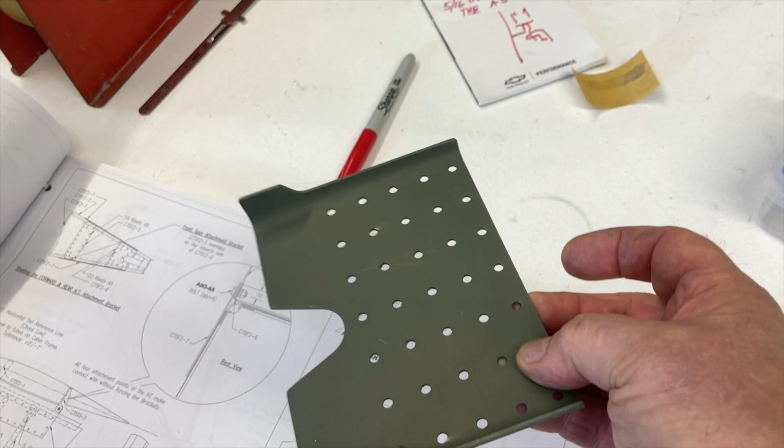All right, I finally got it done and it came out really nice. As you can see, originally there was a piece all the way across there, and they had it outlined where we were supposed to cut it and then trim it. And I did all the measurements to see if they had the lines on there correct, and they did a really nice job. But I went back on the lines with this and added just the width of that marker.

I can always file that down if I have to, but that is exactly the extra that I left on this part and this here. This is that bracket with the tab. I'll just call this the tab. This is the outside bracket that a bolt goes through to the tab.

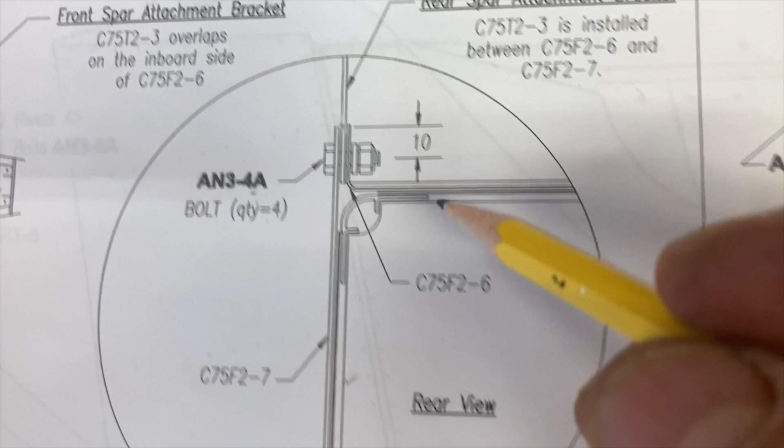And up here is the blow up of it. And this is the tab. And it's sandwiched between the outside bracket and this inside bracket. And that is the only thing holding the stabilizer to the airplane, except for, of course, where the tail overlaps.

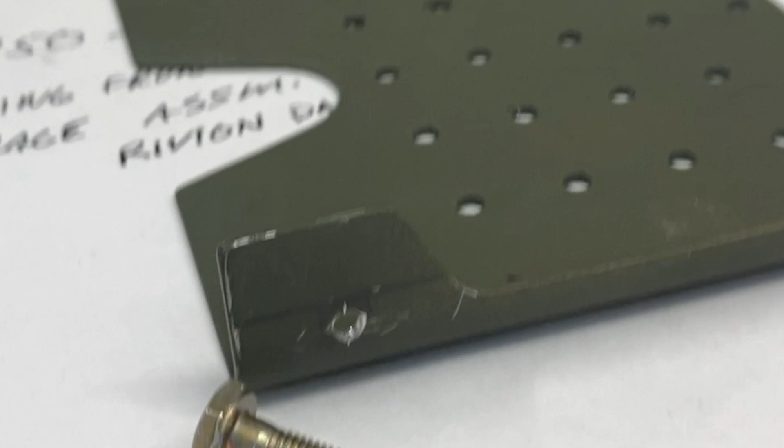Okay, I finally figured out my edge distance. I wanted to get my pilot holes drilled before this is on the tail and I'm up on the airplane with it. So I absolutely know my edge distance there, and everything's going to be built off this bracket, edge distance wise. I added a 1/16 of an inch.

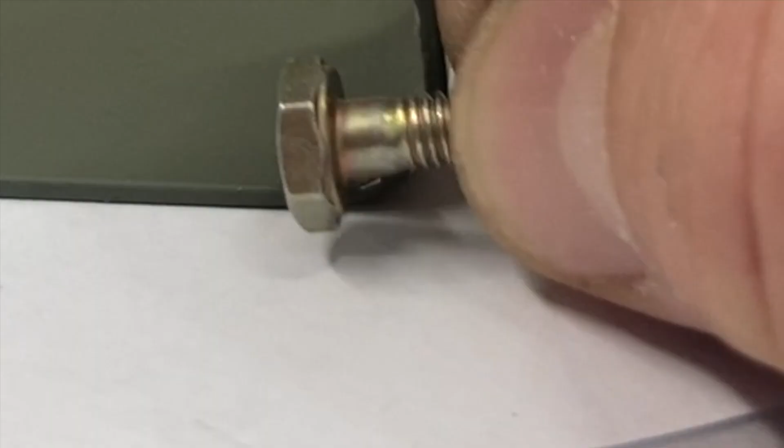It's going to make it a little more challenging to get this to clear the radius, but I can make a washer, carve that washer out that I make so that this sets without touching the head on the radius, and I'm pretty confident in that. And everything's going to be built around that dimension right there.

Okay, this is where we're at on the stabilizer and the elevator. I've got all the parts prepped. I've got the ends all rounded, sanded. Found a really good way to denib without using the whole denibber, because that does countersink, I've noticed, every time I use it. These were pretty wonky. I still got to do some work to them.

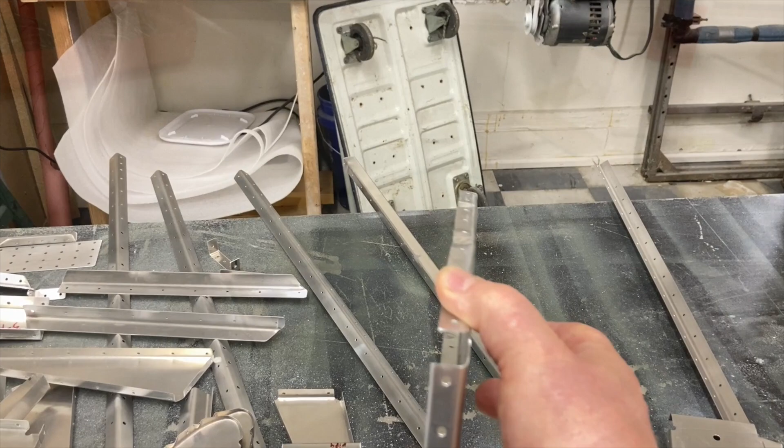I had to reflute this one right here a little bit, trying to get a little bit of bend out of it. Found a really good spot here. I take the angle pieces. I got a new technique. New. All this is new to me. But let's just take one of these pieces out here and I'll show you what I mean. Talked to the guys on Facebook, and they seem to think that it's okay.

I lay this on here, use a block with 400, and it's the aluminum oxide paper, and just sand along really nice, flip it over and do the inside, and it just doesn't take off hardly anything, but it makes the holes nice and square.

When I use this tool, which is a great tool, I've looked at it close. It does seem to countersink it slightly. I love the extension so that I can get into places, and this one's great for bigger holes, but I haven't got into that yet. But that's where we're at on this.

The other thing that I found is there's a little bit of bow in this. I can't get them completely out. I've taken two pieces of wood, this is how I handled the bow. I put it right between two pieces of wood on the table and slightly pushed it down, and you can tell the resistance and what it can handle and what it can't handle.

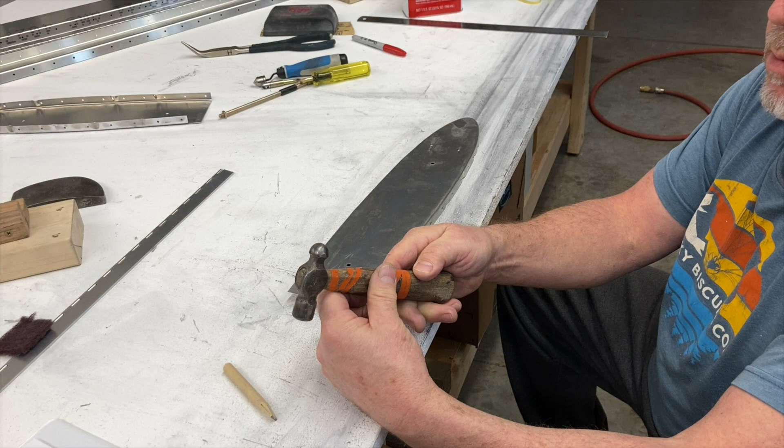I've always found in woodwork or in metalwork that, maybe it doesn't make sense, but the smaller the hammer, the more you move the metal instead of just bending it. I just put that flute in there without fluting pliers.

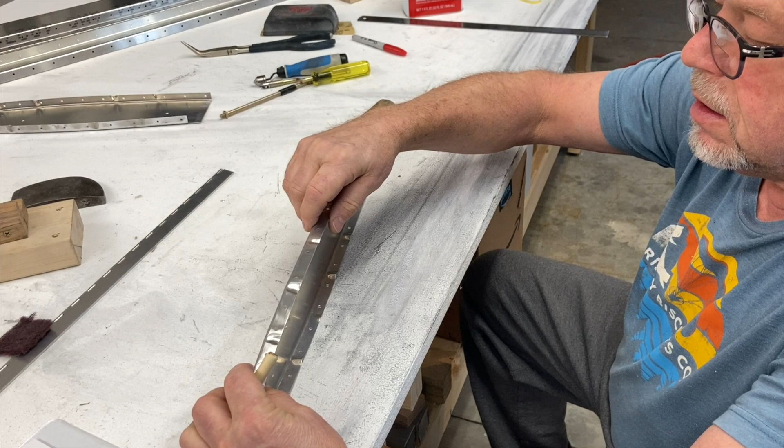I got a method up there I was using, but I just wonder if these two holes now are so much closer that the skin's not gonna fit right. We'll find out. Stick around and find out. You gotta sneak up on it, right? You don't wanna all of a sudden just bend it. That don't work. I think that one's good.

Now to just double check all the center ribs. These are easier to check. They're not as bowed. Use the edge of the table, it's really straight. You can just look down through it, see if there's any holes way off. Well, it's good.

Well, I committed to this hole so that I would have enough meat around it. I know it's going to be hard with it being sandwiched and all to find exactly, once I get that centered on the plane, where to drill. But I'll deal with that then, because I didn't want to put this on and drill through and find out that my edge distance, because this is a crucial part to me. So I will figure that out later.

The other thing I might do, which I started to do on this, I've ordered another one already, is I want to radius this so that, if you know what this part is, the C75 F2-6, this fits on the very back of the fuselage. And I hope you know what I'm talking about here. When this is straight, it hits that radius really soon.

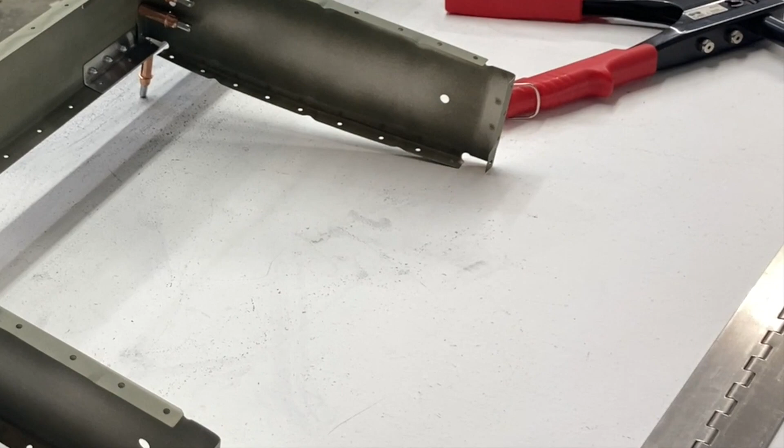Well, everything was dried good enough that I could start clecoing it together. And this is the rear spar, the one with all the attachment brackets. And the only thing I would suggest at this point, so that was just a tad complicated, was the little niche right here. You can put those on in a way that when you attach this to that spar, these could be flipped over. So make sure that that is considered the bottom and it attaches to the rear spar.

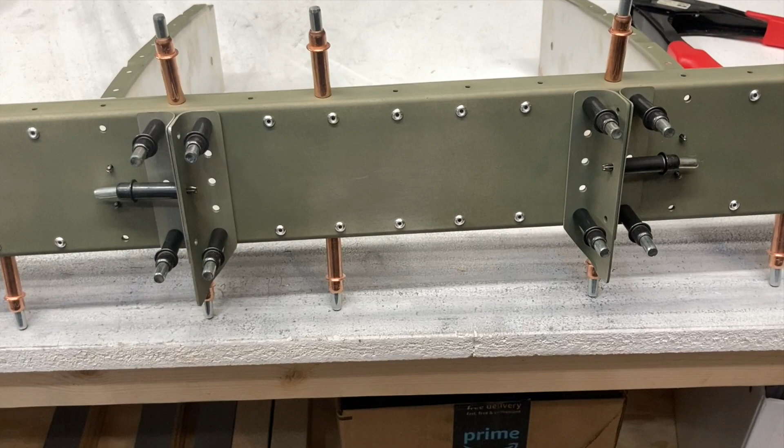So all my niches are pointing down and all the flanges are pointing from the center out, and I'm ready for the next step. One other thing is the front attachment brackets can only go one way. They fit really nice.

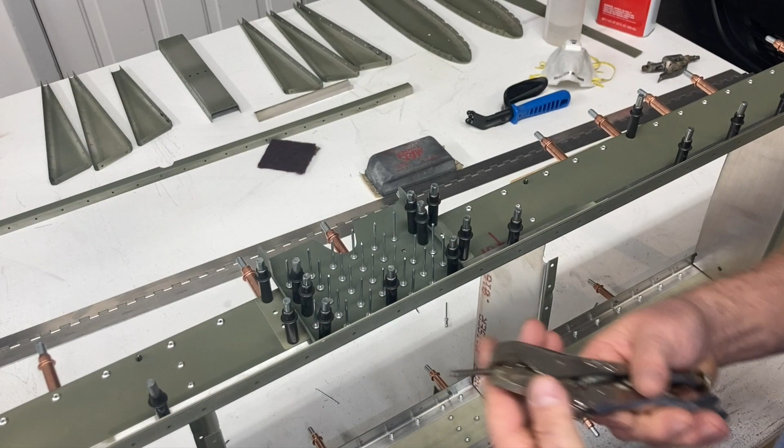Well, I got to just throw this in there somewhere. Just a fun fact for my build is taking a drill and turning it around backwards in a vice grip and using it as a punch, because most punches are angled, at least mine are, and have a hard time getting holes lined up for several layers, and this works really well. It keeps you from upsizing with a drill.

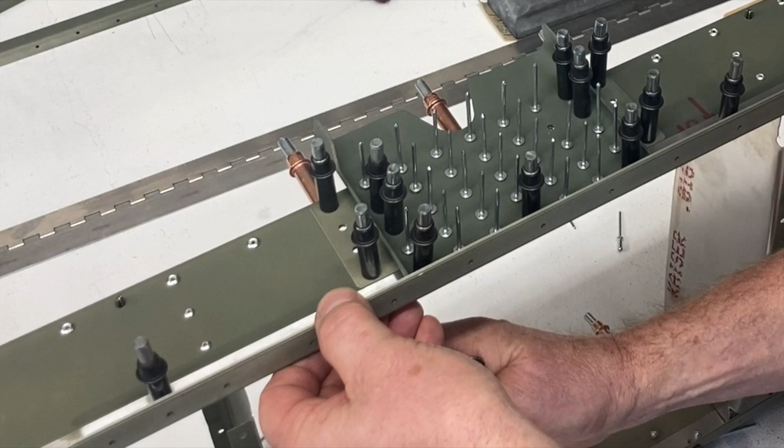Like this one, I can't get it in, and it gives you enough leverage there. I finally did. It cleans. I don't want to ever upsize a hole with a drill if I can help it. And I will if I have to.

And I got a lot of respect for scratch builders. I can't imagine. They're really good. And they don't get frustrated probably when they can't get a hole to quite line up. A lot of guys put these in a bowl, but I actually enjoy picking them up.

That's like information in the British baking show. Put flour in water and bake and make it a masterpiece. I wish they'd give us a little more idea what they want, but I'll figure it out. Maybe there's something on YouTube.

Well, finally the next step. I'm gonna lay it on the table and try to get it as square as absolutely possible so the skin will be right. Okay, this is what I came up with. 3/8 piece of plywood, the cleanest kind I could find, to lift that edge enough in the front so that the back would be supported on the table. And then I put these little wafers in to retain it so that it doesn't want to tip forward. And I left them just the right tension so that I can still move it slightly if I have to.

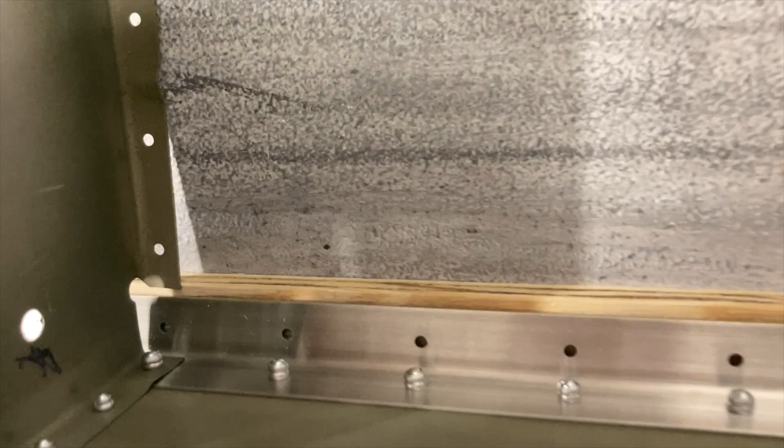And the front looks like this. And I checked ahead, and of course the skin needs to lay over the table. So I set it back and I stapled it back across the front edge with a gauge so that it's equal. And I'm just leaving it back far enough that this doesn't touch it. And I'm really close to touching it. So what's the next thing?

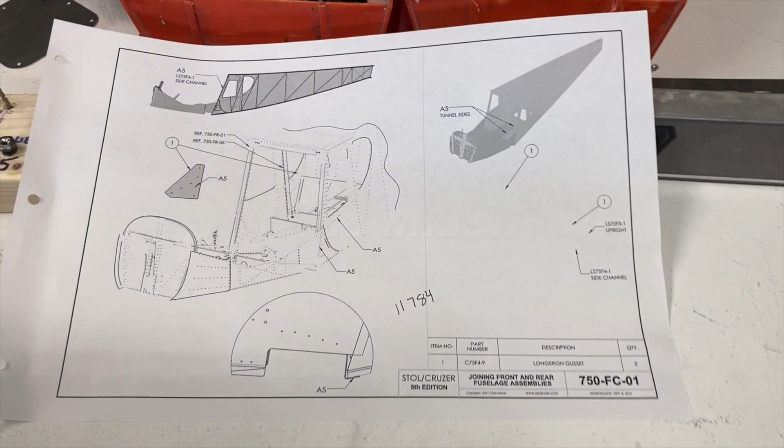If you look at your book and it looks like this page, you're going to need another one printed. Just call them down there and they'll print you this one. The 750 FC-01. It's missing a bunch of stuff.

All right, we're going to end this one right here. What's making me want to laugh is I just got done doing about 3 exits, outros, or whatever you want to call it. And they're just awful. I just seem so bored, like a big stick in the mud. But I'm not. I'm having a lot of fun. It's a lot of fun.

Really enjoying it. So, yeah, the next video, we're going to put the skin on. Just got to deburr it. And we'll know if the angle drill works good because I've got those little angles to build, and they're down in there tight. And come back and see that one.